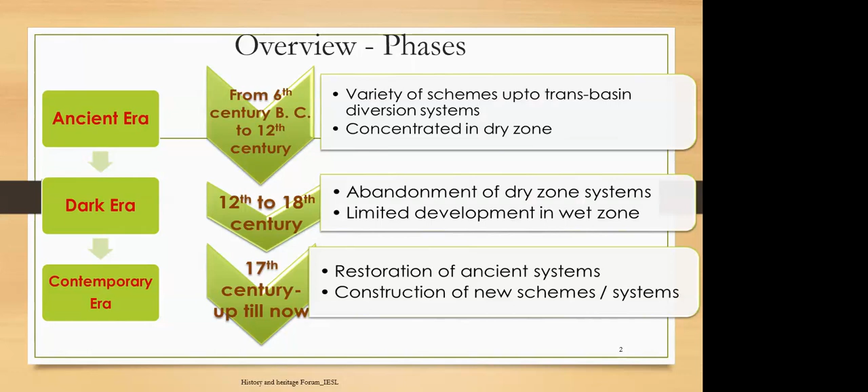The next phase of the contemporary era begins when the colonial rulers start restoration of the abandoned system, and it continues up till now. I will be talking about this last phase only, which will eventually make references to many works in the ancient era. So the contemporary era can be further divided into three main sub-eras: the Dutch era, the British colonial era before independence, and after independence, that is the Ceylonese era.

During the Dutch period, certain attempts were taken to revive the ancient irrigation systems, especially in the maritime area. New irrigation development such as the Urubokka scheme in Magampattu was initiated, in addition to drainage development done by them.

During the British period, there was a period of total neglect on restoration, when the British rulers could not comprehend the situation in the country, in their colony, and thought only of their priorities. Then there were purposeful destructions when they could not control the rebellions, especially in the hill country and Wellassa. After having bitter experiences with all these episodes, the rulers realized that revival of the ancient irrigation system was the only path for their peaceful survival.

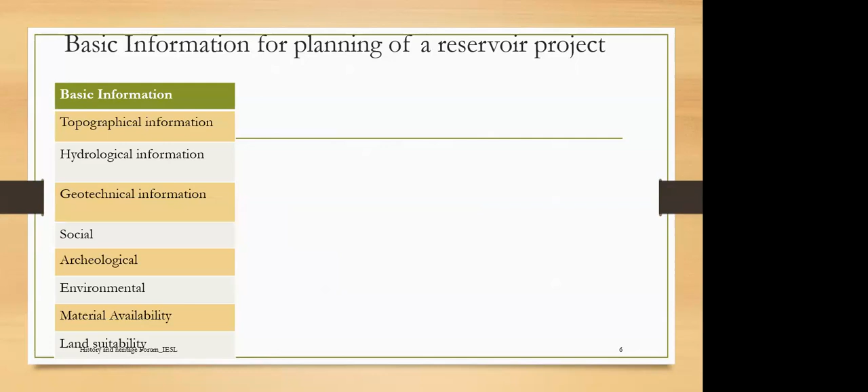If I go to the basics, in case of restoration of any abandoned scheme for many decades or centuries, or for any new construction of reservoir or irrigation system, the engineer may need the following basic information. Under current technological development, some of these are easily achievable, while we need sophisticated instruments or machinery to explore others.

We can appreciate the achievements of our ancestors if we realize how difficult it was to acquire this information when the technology was not as advanced as the current situation. I want you to remind yourselves of these matters throughout the presentation, because without this information, construction was done during the ancient era, and most of the restorations were done without these tools, methodologies, and instruments in hand at the beginning, especially.

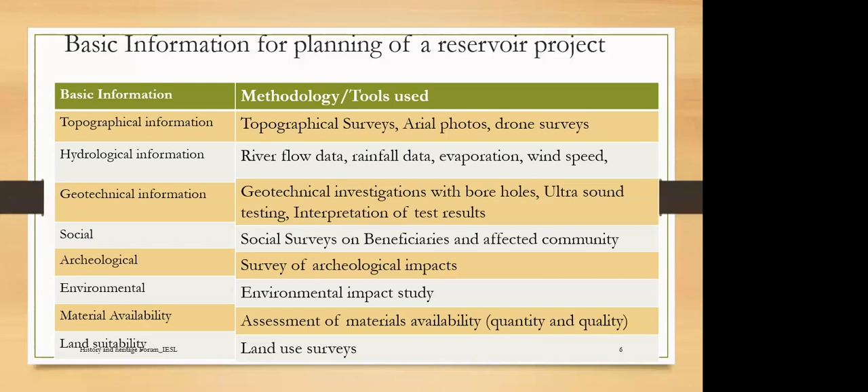So if we consider the mid-19th century, when restoration started, and compare the basic information needed with what was available, there were no survey maps at all. Most of the basic information I mentioned in the previous slide was not available.

Under some major schemes, there were no inhabitants depending on them. Many schemes were converted to thick jungle, and one cannot identify them. If you go into the forest, nobody can identify whether it is high ground or part of a breached dam, something like that. So no technical standards, guidelines, or specifications were available, even to refer to.

The government targets those days were food security, reducing imports, and land settlement - developing land settlements for people to settle under these schemes. No environmental or archaeological regulations were there during that time, and technical standards, guidelines, and specifications, both locally and internationally, were not available. Those engineers from the UK who were engaged at the beginning also had very limited experience, because reservoir construction itself started in the United Kingdom only in the 19th century.

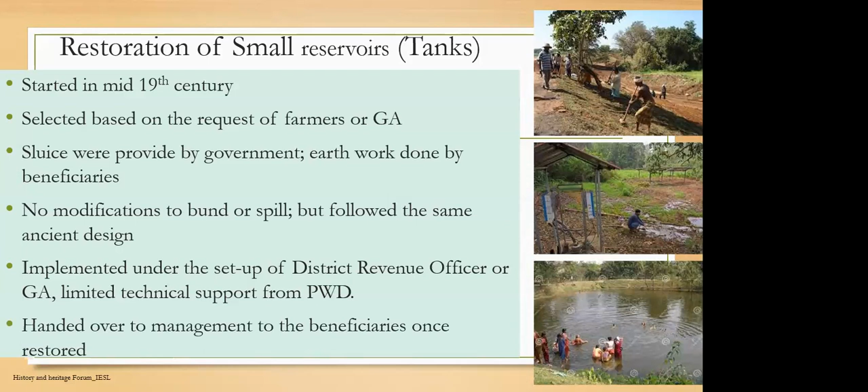As I mentioned earlier, only physical observation and some limited surveys could be done to restore the village tanks. Things improved when the government started developing topographical surveys in the country in the 1870s. When the whole island was covered by this type of 1-inch map, everyone realized the extent of irrigation systems that had been developed by our ancestors and which were now in a dilapidated condition.

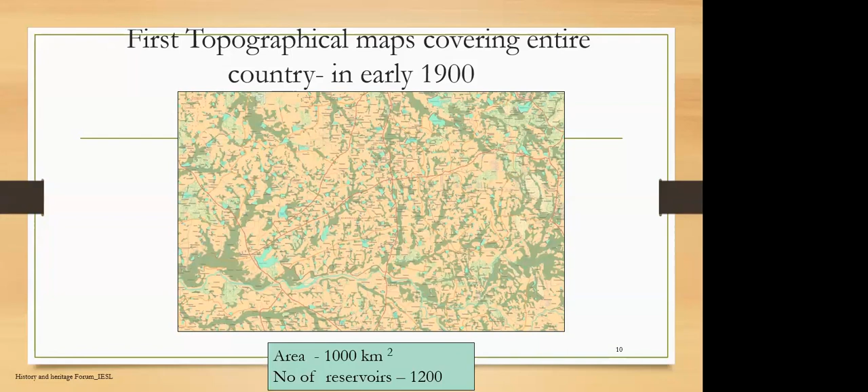Most of these reservoirs—this topo is from the 1960s, but the topo sheets prepared in the early 1900s had shown most of these village tanks in an abandoned state.

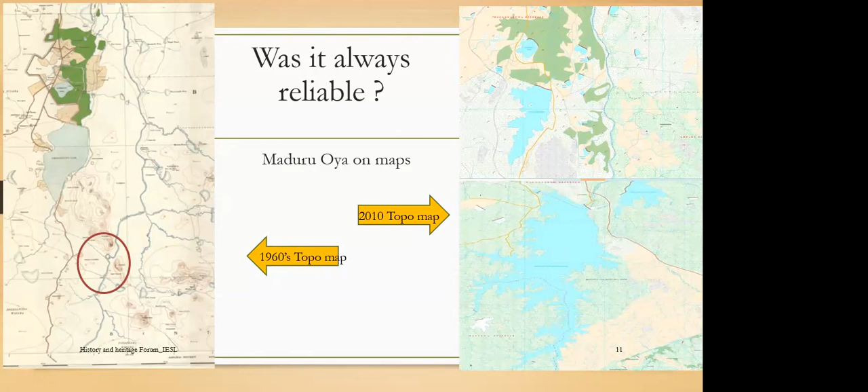Let us now see what type of sluices were constructed in village tanks during the 19th century, when restoration work started. There was no guidance for the engineers to follow during restoration, as I mentioned previously several times. So most of the solutions were based on their limited knowledge and exposure gained during graduation or while working in the field.

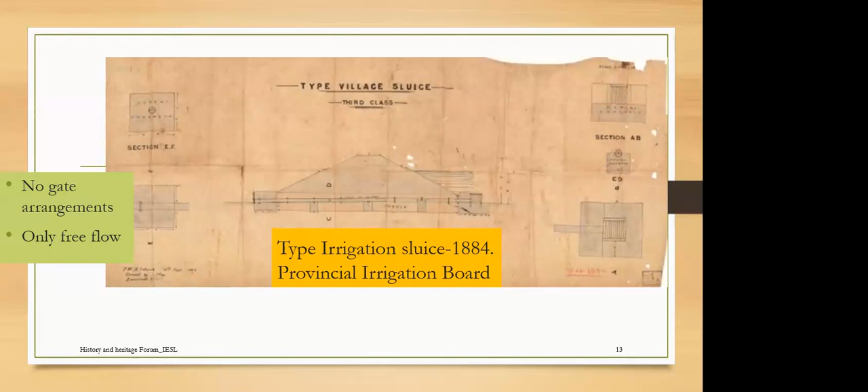This arrangement is a bit more advanced—this 1884 type plan for a village reservoir. It is a bit of a sophisticated arrangement for the sluice inlet, but only a free flow is allowed. There's no gate, sluice gate, or sluice well introduced there.

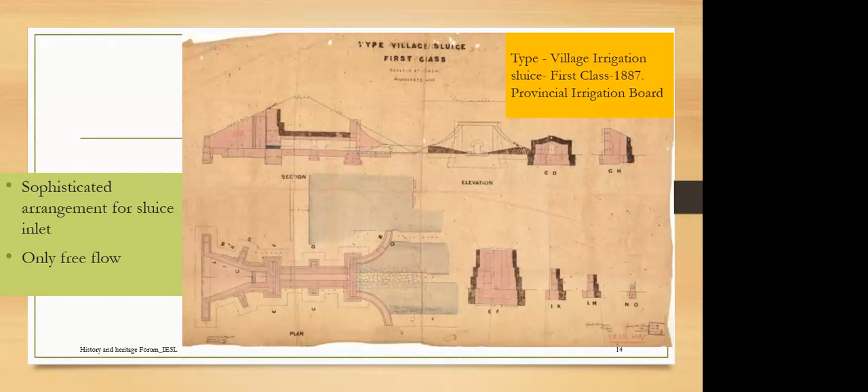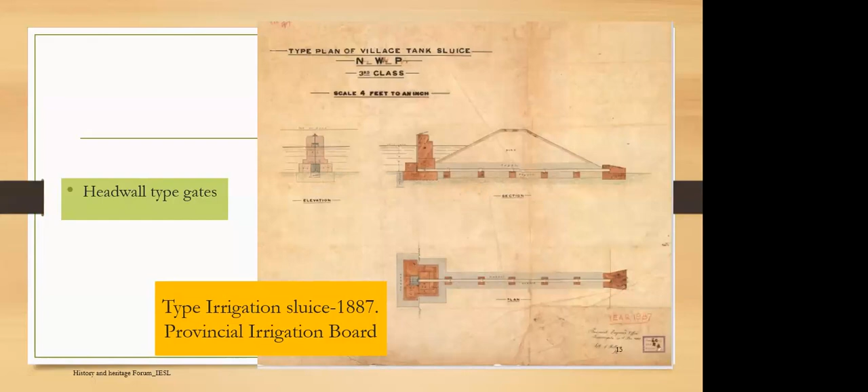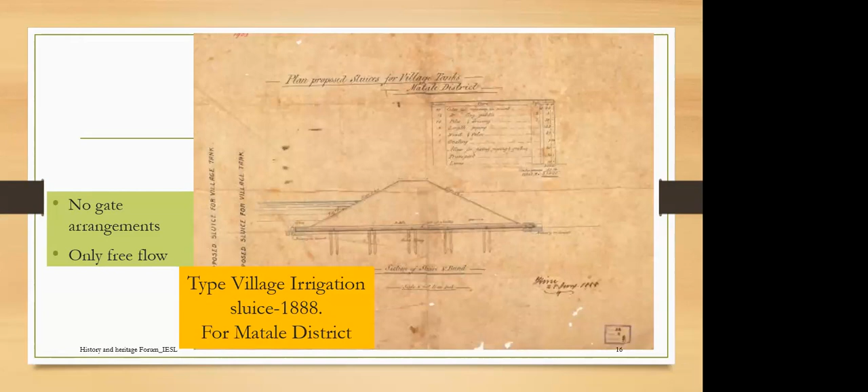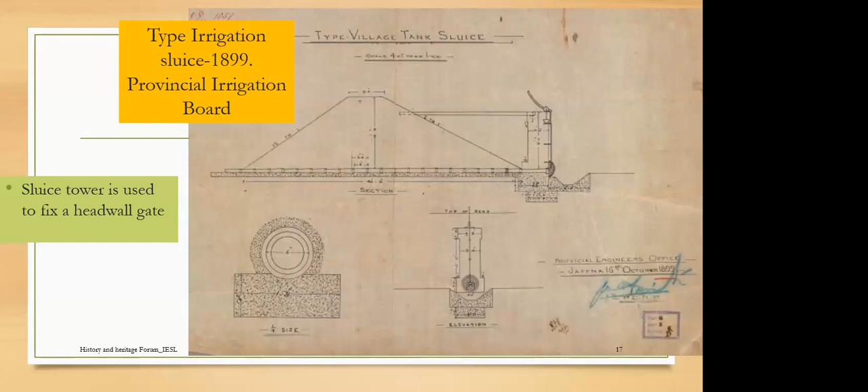I'm sure most of the irrigation engineers working in the irrigation sector here in the audience will have a lot of comments about these primitive arrangements. So I'm not going to highlight the shortcomings of all these plans I've shown so far, but just mention briefly that British engineers would have learned through trial and error methods for the best suitable solution for the sluices in these small tanks.

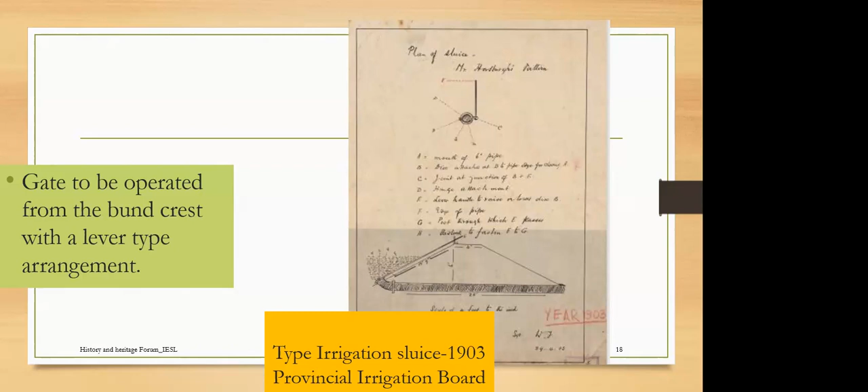The next important component of a reservoir is the spill, whether it is a village reservoir or a large reservoir. So what technique did they adopt to provide spills to the village tank? It is the same spill location and length they provided when the restoration was done.

The trial and error procedure was the order of the day, and this procedure had to be changed due to one fateful event in 1923.

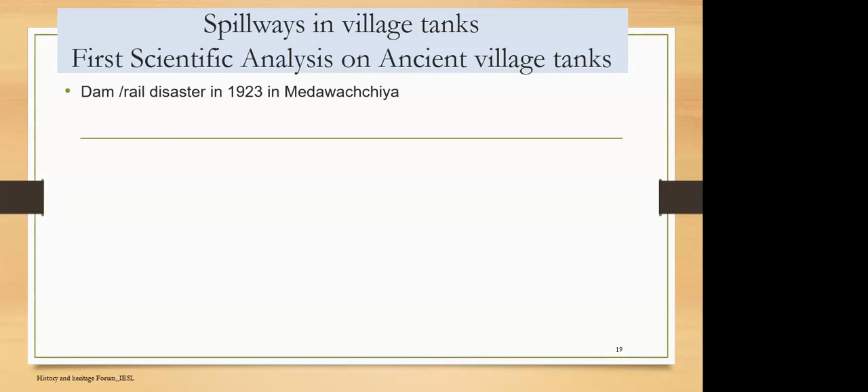That is the rail dam disaster in Medawachchiya. What happened was a night train traveling from Mannar to Colombo got caught in a flood due to a dam breach, and the train got derailed. Under the flood conditions, like a Peraliya tsunami case, 20 persons died on the spot and 35 persons were seriously injured with fatal injuries.

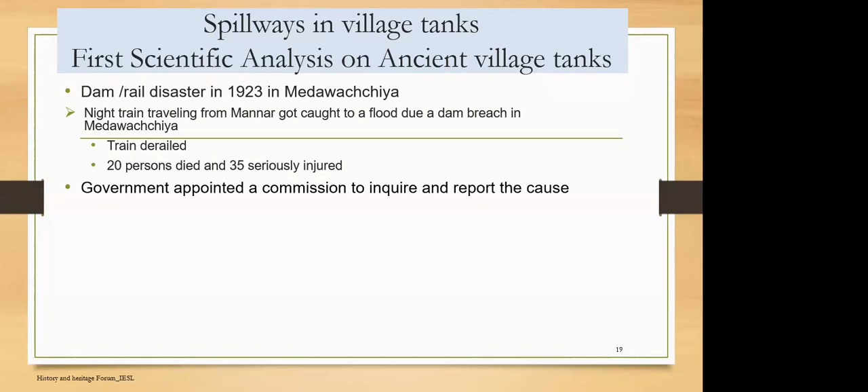So the government appointed a commission to inquire and report the cause. In those days, the government took the commission report very seriously, not like today. As a result, technical investigations were carried out as a follow-up of the commission's recommendations.

The commission report recommended that all the small village tanks from Polgahawela to Mannar, and also the Jaffna railway line that could be affected by damage from any small village tank, be inspected and reported.

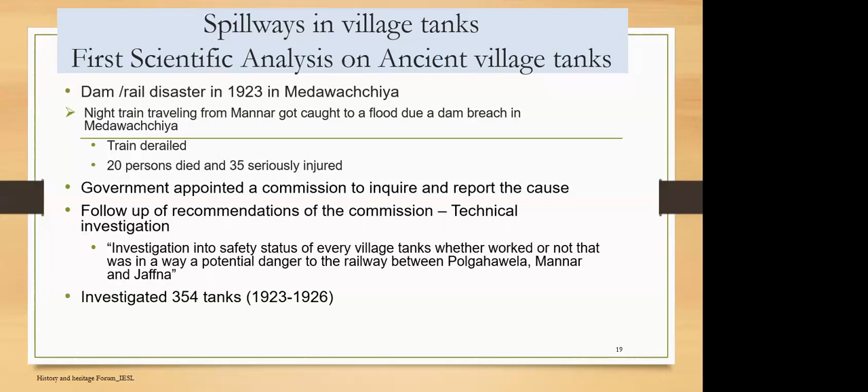So the Irrigation Department conducted investigations on 354 tanks during the 1923-26 period, and the results were submitted to the government.

Moreover, the engineer J.S. Kennedy, who was the team leader and who later became the Director of Irrigation, presented a paper on this investigation and study to the scientific community of engineers. It is called the paper on the evolution of scientific development of village irrigation works.

I recommend, especially the students listening today, to read this paper and get an idea of how much detail went into analyzing the situation of the village tanks at that time.

The paper concluded with recommendations to follow up. At that time, only one department handled irrigation-related work, the Irrigation Department, so it was not difficult to combine the suggestions in the technical paper into the official procedures.

The paper gave comprehensive guidelines for preliminary investigation, detailed investigation, and so on. These were embedded into the official design and planning procedures and continued.

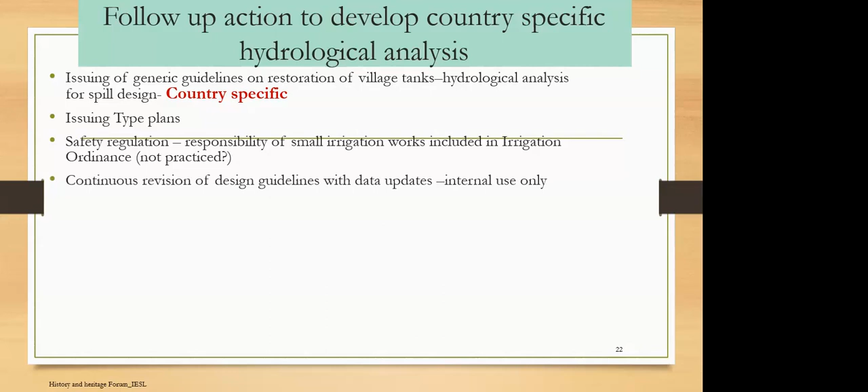The design guidelines were updated continuously in the irrigation sector, especially for internal use, and developments continued like this.

In 1983, I'm sure most of you know about this, engineer Ponrajah published the design of irrigation headworks in Sri Lanka for small catchments. That was a continuation of the previous paper I mentioned. Engineer Arumugam also published several other guidelines in the 1950s.

This became a national level guideline when other water-related institutions came into the scene, such as the Mahaweli Authority, the Agrarian Development Department, and so on.

The most recent development in this area was last year, when the 1983 guideline was updated, especially with 80 years of hydrometeorological data collected by the Irrigation Department's Hydrology Division. Climate change impacts were also considered and included in this guideline.

So you can see the progressive development happening. It is not a stagnant or static subject in this matter; it is a very dynamic subject, changing day by day.

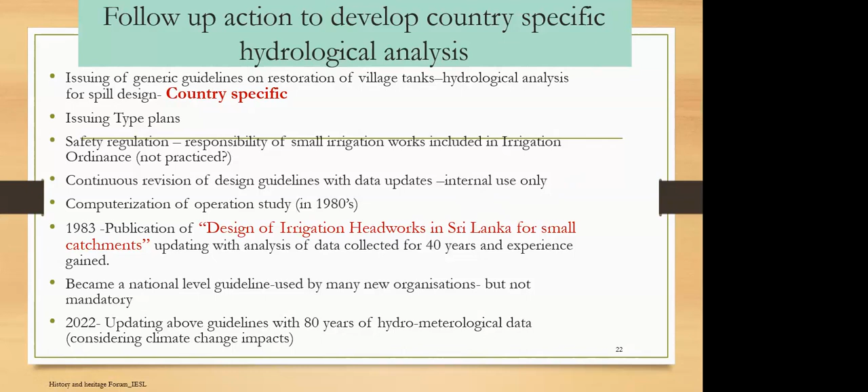So the next development in this area is the exploration of the single small reservoir in this type of model. Thanks to those who have enthusiasm for studying village irrigation systems more holistically, as shown in this manner.

Now the village irrigation scheme has been identified as an entity having many more integral items in it. Most of you are familiar with this diagram, I hope. And the features that supported the sustainability of the ecosystem, which I'm not going to discuss in detail, a lot of literature is available on the internet on this.

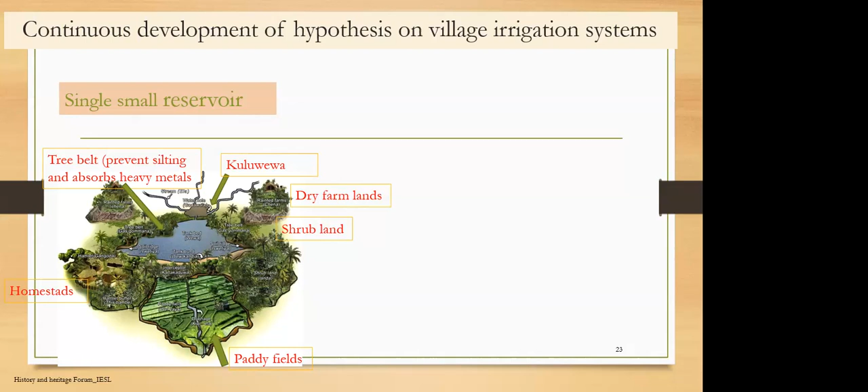And the next level of this hypothesis was developed around the village tank is the cascade system. So it was mooted in the mid 1980s by Professor Madduma Bandara and other scholars, and this is now recognized by the United Nations FAO as a globally important agricultural heritage site.

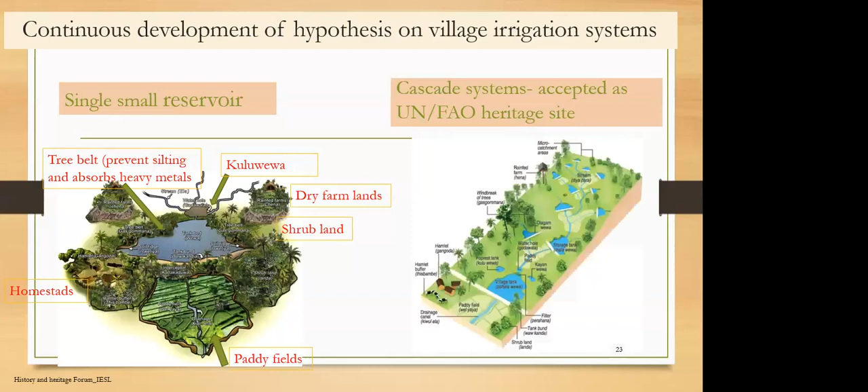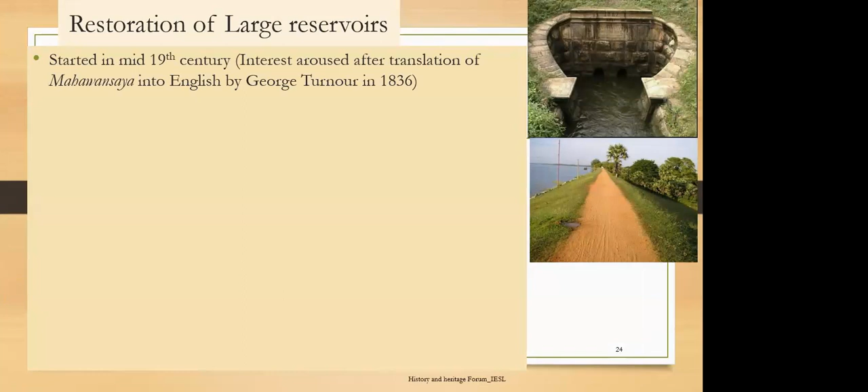Okay, now let us move to the large system, large reservoirs. Restoration of large reservoirs started in the mid 19th century, just after starting the village reservoirs. Then it is said that the interest in large reservoirs actually arose after the publication of the Mahawansaya in English in 1836. It mentioned many large irrigation systems, including trans-basin diversions.

So the selection for restoration was done based on many factors, not like village systems. More comprehensive and accurate surveys were needed for large systems. It is very obvious. The Central Irrigation Board and other organizations, along with the survey department, had collaborated programs.

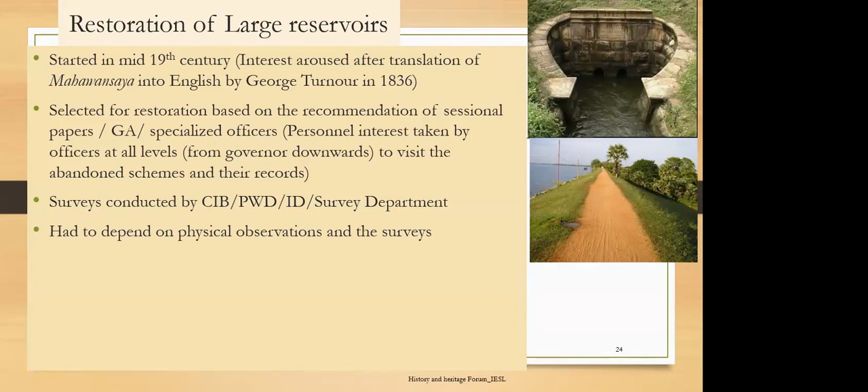And many decisions were based on matters collected through physical observation at the site, and also consulting the inhabitants, and also some sort of hydrological analysis based on the physical evidences in the catchment, and also investigations from time to time, continuously doing investigations until the financial and social conditions become suitable.

So the government's attempt was to recover the cost of the restoration by selling the lands.

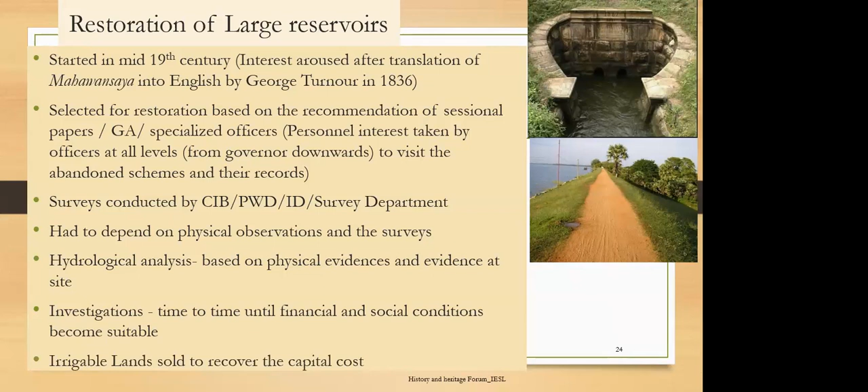When restoring the ancient headworks, the same dam was used if found suitable, with repairs and sometimes with geotechnical treatments. In many of these schemes, spillway locations were at the same place, as it was the best suitable place for discharge of excess water. You can see some photographs showing ancient sluices and ancient dams that were restored.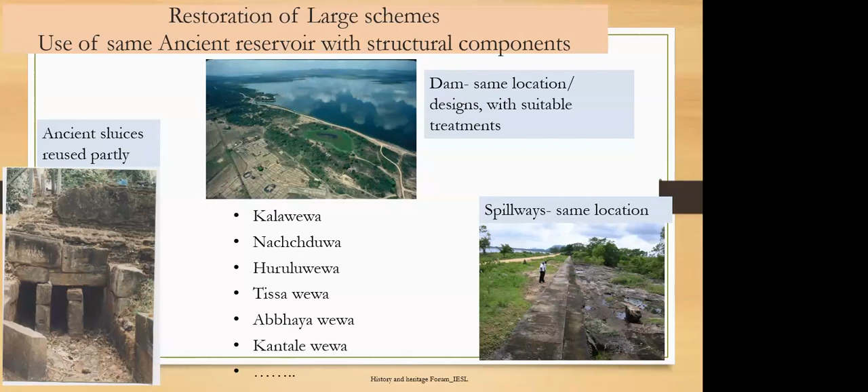Then there was another type of restoration of large reservoirs: if the abandoned schemes were badly damaged, new headworks close to the ancient dam were adopted. So Rambaken Oya, Mahawaya and Maduru Oya are some examples. When engineers conduct geotechnical investigations on old dams, sometimes they find these are not suitable for restoration due to many shortcomings in the dam body, quality of material, and things like that. So a close location, especially upstream of the reservoir, is taken, and an entire new dam and new reservoir is built in association with the downstream system.

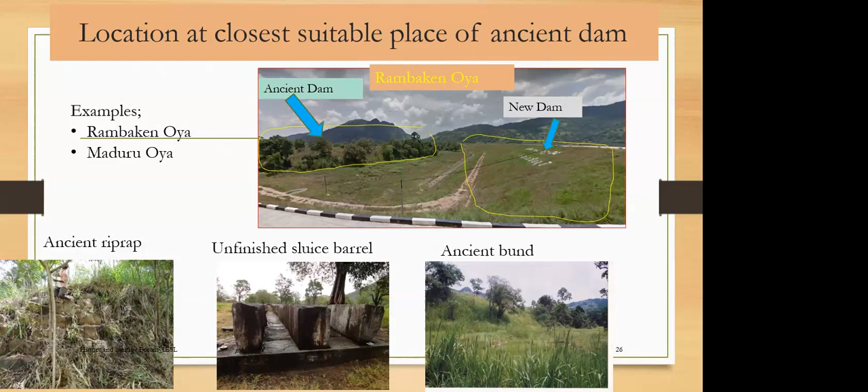So fortunately, these theories and practices... actually, as I mentioned earlier, the physical observation of all these components of abandoned schemes was not possible at all. So to get an overview of the overall understanding of an irrigation project, that type of leveling would not be enough. The project may be scattered over maybe hundreds of square kilometers.

Mapping of a project area is needed to get a more clear idea about that. So fortunately, the surveying theories, practices and technology had been developed to a substantial standard by the mid-19th century. So the surveys done on ancient schemes provided sufficiently reliable, comprehensive data for the restoration decisions.

This is a tracing of the ancient Kalawewa Bund done in 1883, and the tracing is actually dated 1903. It gives the details of the whole Kalawewa Bund, a 5 mile 4,000 feet long dam, showing where the breaches occurred. There are 11 breaches along the bund if you look closely at the map, and the spill level is given, the emergency spillway is marked, bund crest level, and all these details are marked in this survey. So that is why I mentioned that the surveys had advanced to a certain degree, an advanced level, at that time.

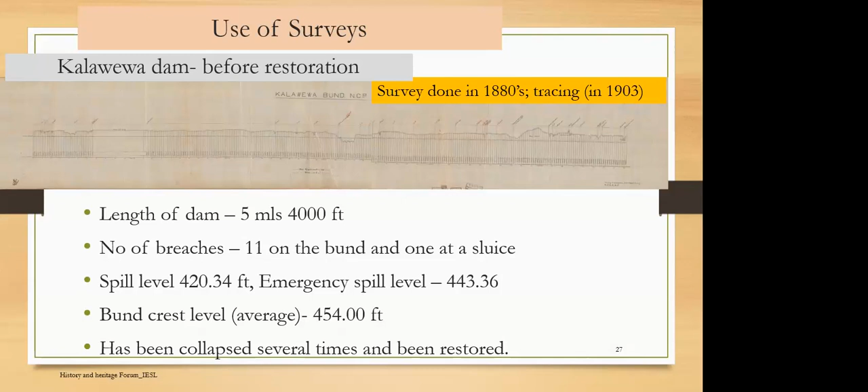Now irrigation officials demarcate the area, and the irrigation officers have to be satisfied with the detailed information. So the next step was to develop engineering surveys on the area where they are going to restore the irrigation system.

The procedure was to get the selected area on a topo sheet and prepare a key plan, like shown on the left hand side. This is a key plan prepared for Elahera headworks, given to the survey department to conduct the engineering survey. Here is the detailed engineering survey sheet, marked with contours at intervals, in scales of 1 foot to 250 feet, or 1 foot to 520 feet, depending on the specification given by the irrigation department.

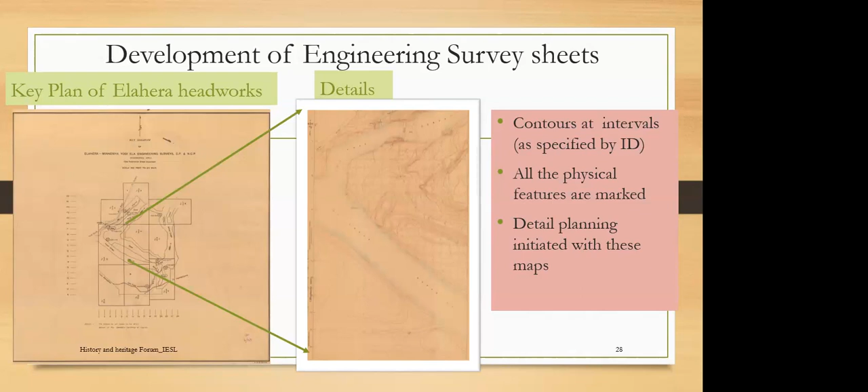This map is the detailed map of the Elahera Minneriya area, Yoda Ela, which gives a plan and longitudinal section on the left hand side, with all the details of the beaching sections and cross drainages coming through, and irrigation outlets that were there earlier.

So the engineer can easily identify the repairs needed in this transbasin canal and prepare an accurate estimate. The engineering survey sheets were translated into blocking out plans, as shown on the right hand side, showing the irrigable area, identifying drainage paths, reservations, community centers, and everything needed in a newly developed area that should be restored.

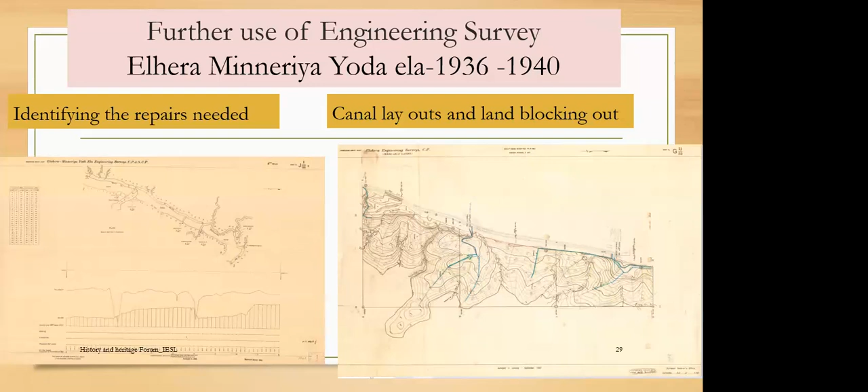This is a blocking out plan prepared in the Kalawewa, Kagama area. It marks all the physical features existing and proposed, additional minor sluices, and new community centers proposed. Those are highlighted in my map here.

So for you to get an idea about the planner's intervention at that time - there are thousands of these type of drawings shelved in the survey department and also in the irrigation department, which will be very useful for future researchers to compare the status of a scheme with its past condition.

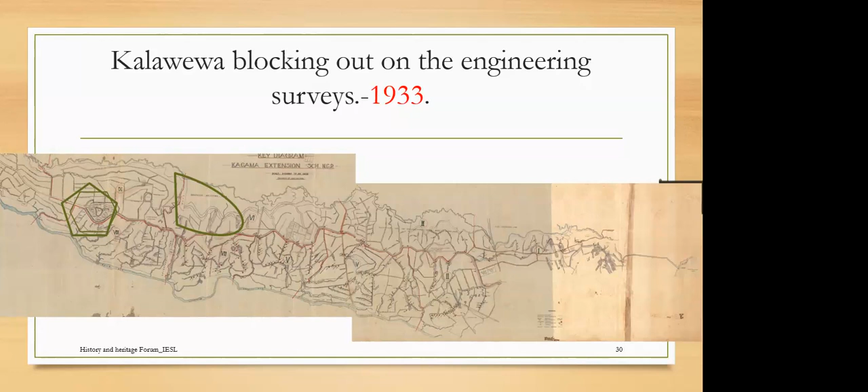Then I will move on to discuss briefly the observations made on spills, embankments, and sluices in ancient large reservoirs.

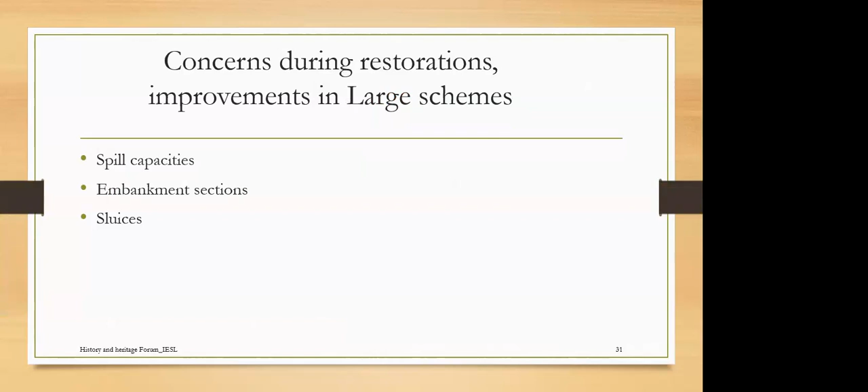When coming to the spillways of large schemes, it is not as simple as village tanks. It was found that major dams always collapsed due to overtopping of the bund, not structural failure of the sluice or anything. Spillways were not sufficient to pass the flood. It is almost a similar case in village tanks.

Basic theories of hydrological analysis were developed by the early 20th century for engineers to carry out operation studies. It was found that spill lengths provided in ancient reservoirs were not sufficient, and hence all restorations required new spill lengths more than double.

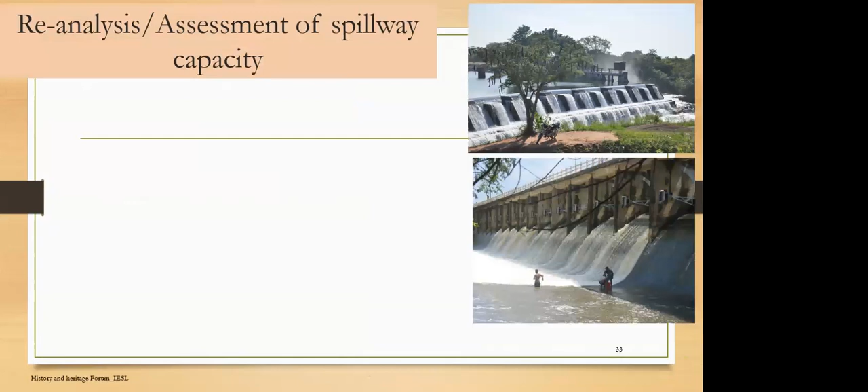Even with the increased spillway lengths, the spillways were insufficient, and that was revealed during the 1957 floods, when 35 major dams and 53 medium dams were breached during the heavy storm. Most of these major dams were restored with radial gated spillways, a new introduction to the spillway design done to cater for the shortage of spillways.

Some of the dams washed away were Kalawewa, Nachchaduwa, Huruluwewa and Padabiya. Many dams in the northern province and north central province were breached during that period. So instead of clear overfall spillways, most of the spillways were replaced with radial gated spillways, or some other gated spillways.

The flood that occurred in 2012 reminded us again of the necessity of reanalyzing the adequacy of spillways under climate change impacts. In most of the schemes, additional emergency breaches had to be done in 2012, and that opened a new pathway for engineers to think about spillway designs in a new approach.

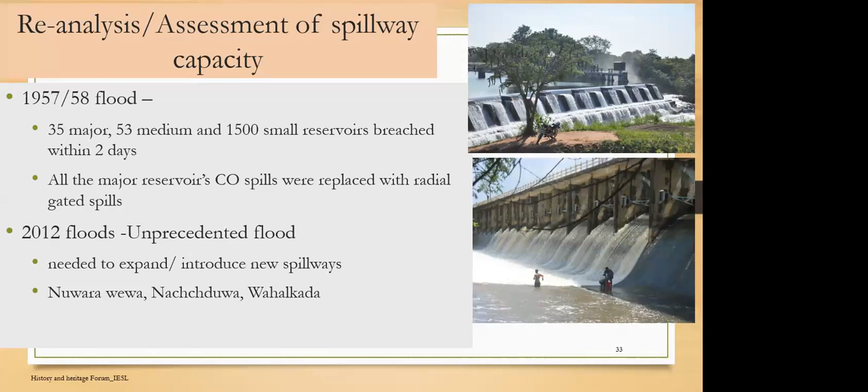Coming back to the high freeboards allowed as a safety measure in ancient dams, I can quote many examples. Here I took Kalawewa again to illustrate this. Some of you have visited Kalawewa and would have seen this ancient sluice of Yoda Ela, and the water when it is above the full supply level.

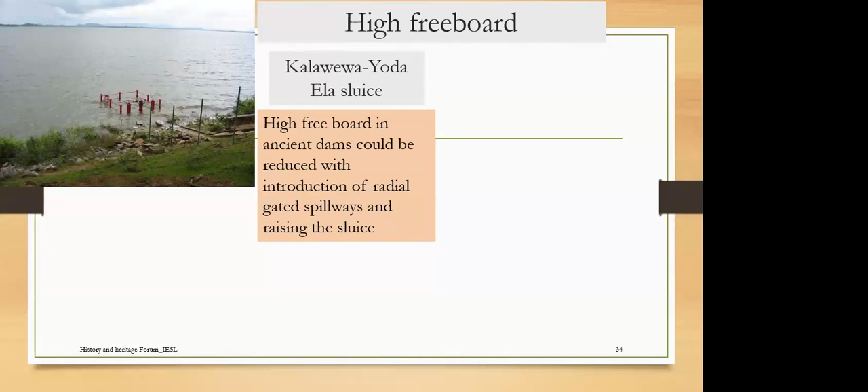When it is reaching the full supply level, the cross section below shows the design of it - the sketch allowing very high freeboard, with the sluice barrel well below the bund crest.

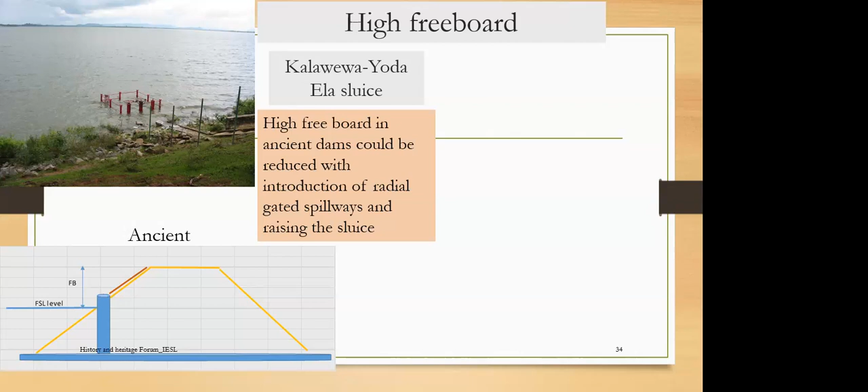The new sluice in Kalawewa is at the same level as the crest of the bund, and then the freeboard is reduced, making use of this additional storage for water management under the reservoir. This can be observed in many ancient reservoirs - if you carefully study, this phenomenon can be easily identified.

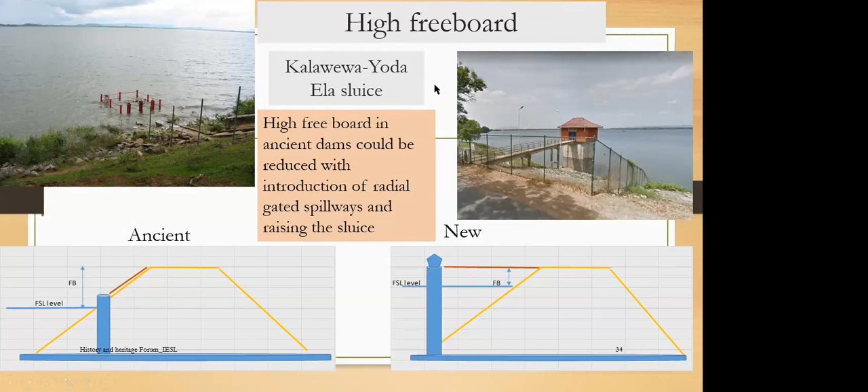My next case is Wahalkada. This was restored in 1971. During that time, it was decided to use the same old bund, and also to use one of the ancient sluices out of the two - there were two ancient sluices.

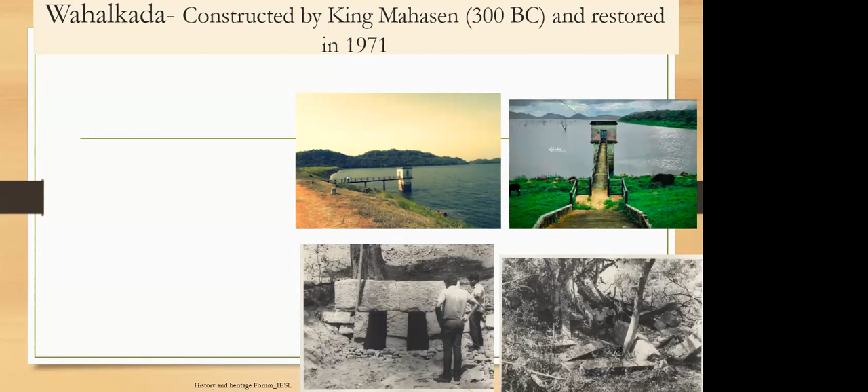But when the construction was going on, it was realized that restoring the ancient sluice would be a risk due to its condition. So by sealing the old sluice, a new sluice was constructed. However, during the first filling of the reservoir, leaks started from the old sluice, and only through grouting could it be arrested. Anyone visiting Wahalkada can still see the outlet of the old sluice, which was sealed from the upstream.

Some of the photographs in black and white show officers conducting field visits during the reconnaissance surveys.

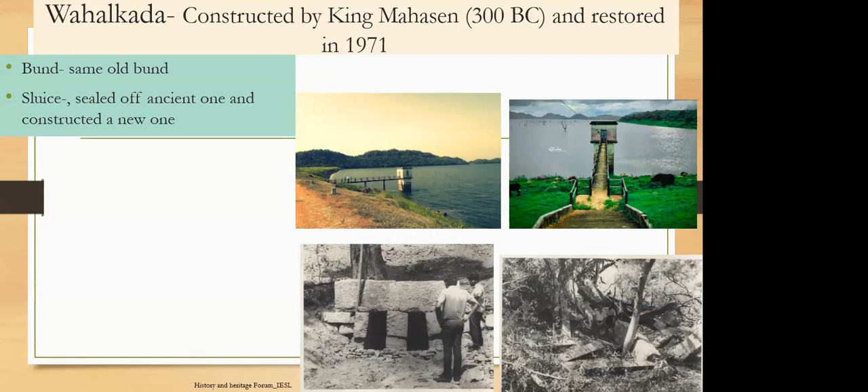The freeboard provided in the old dam was more than 12 feet, and there was no clue at all about any spillway. So designers believed that the reservoir is a non-spilling reservoir, with sufficient detention capacity to cater for the catchment inflow. Even the 1971 design did not provide any spill.

However, it allowed high freeboard, and the crest of the sluice was also kept at a lower level, as shown in the diagram and photograph. By 1984 there was an imminent danger of overtopping the bund, and with some rescue operations it was saved. Later on, the gated spillway was provided.

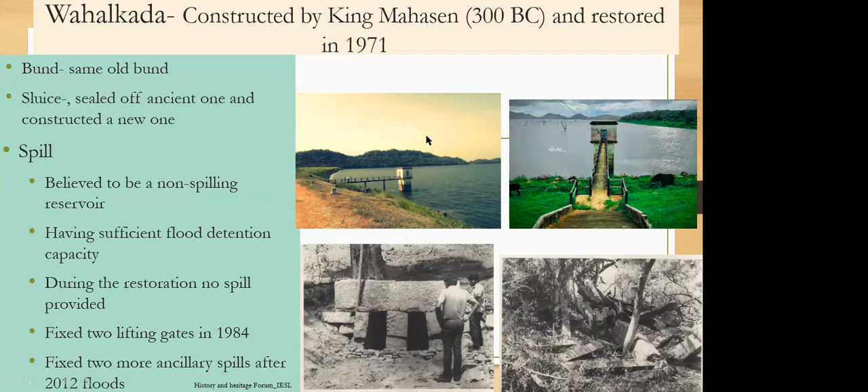And by 2012, this had to be changed again. With climate change impacts, the intensity has increased, so another spill gate had to be provided to the Wahalkada reservoir, which was started as a non-spilling reservoir. That is the story of Wahalkada.

So now this is Lower Malwatu Oya, another large system. If someone asks me to name the most admirable ancient irrigation work in Sri Lanka, my choice is the Giant Tank system in Mannar. There are so many features in this whole system that we will explore even after 120 years of restoration. This is believed to have been constructed during King Dhatusena in the 5th century.

I cannot understand how this unusual design was conceptualized without having a similar model somewhere else - not in Sri Lanka, and even in any other country we don't find this kind of system. According to my knowledge there is no such system; I must explore more whether there are any similar systems in India.

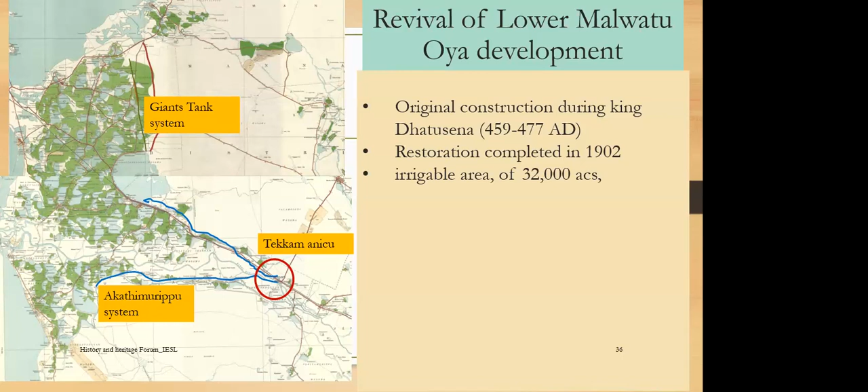A modern engineer would definitely need aerial views or sensitive survey instruments to finalize this type of arrangement in a flat, almost flat area, as this Mannar area is, where the system is laid down. This is a very shallow reservoir which has 7 sluices, which were restored as they originally were.

These sluices serve 162 small reservoirs in the service area. Even though you can see only very few here, there are more than that. This is a shallow reservoir compared with the

irrigable area of 32,000 acres. It receives water diverted from the anicut called Tekkam anicut across Malwatu Oya through a 15 mile long feeder canal. Similarly, another feeder canal from Tekkam feeds the Akathimurippu irrigation system on the left-hand side of the Malwatu Oya river.

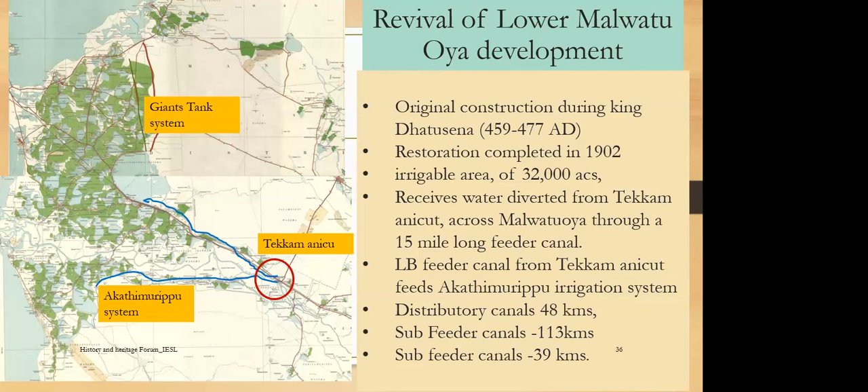The length of the distributory canal in the giant tank system itself is 48 kilometers. Small tank feeder canals are 113 kilometers, and sub-feed canals are 39 kilometers. I just want to highlight these figures to give you some idea of how complicated the system is. It is the same old ancient system that is functioning now.

If you consider the Tekkam anicut alone, it is another wonder, unlike other ancient anicuts built obliquely in a river. This ancient anicut is built across Malwatu Oya, perpendicular to the flow. It stood against gigantic, turbulent hydraulic forces that create flood discharge exceeding 7,000 meter cube per second. It was made with large stone blocks interlocked, with gaps filled with indigenous mortar blended with sand, lime, bee honey, wood resins, and many other local materials.

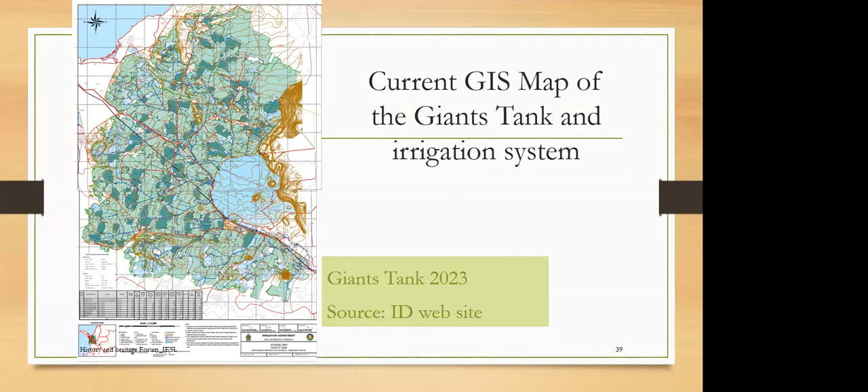As I mentioned earlier, there is a possibility of wrong interpretation of some of the observations made during the initial restoration. The spill path of the ancient tank was identified and restored in 1901.

In such a case, I can quote this example. Until 2014, while spilling, this was the selected spillway path during the restoration, because the spill structure was there at the place shown here in the giant tank's right-hand corner.

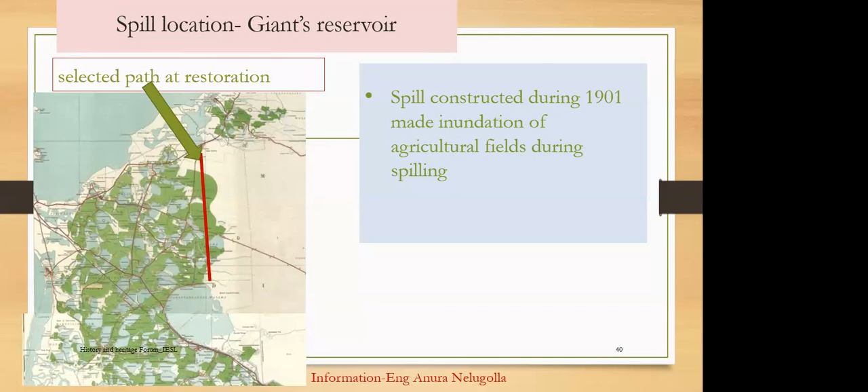After restoration, this spillway caused a lot of damage to the irrigable area, inundating a large area with each spilling. However, during 2014 - that is after 120 years of operation - irrigation engineers found that the actual ancient spillway was not the one selected in 1901.

It runs through another path further northwards to another sub basin. However, this path was not identified at the beginning and was completely overgrown with very thick jungle. It was declared as a national park or strict forest reserve, and got silted up. So it was opened up anyway in 2014, and now it functions smoothly without damaging the paddy lands.

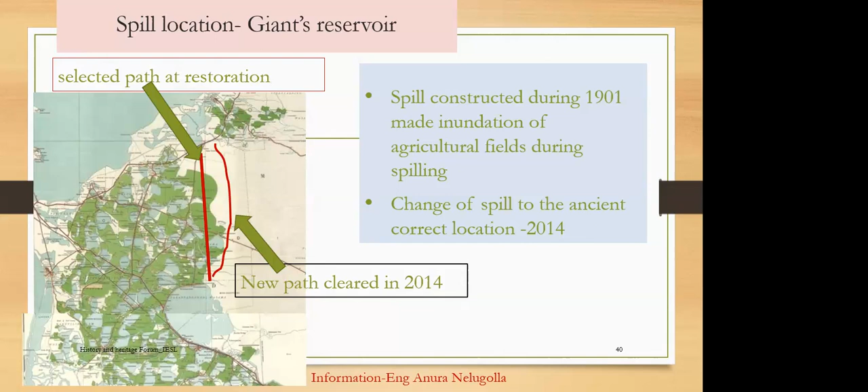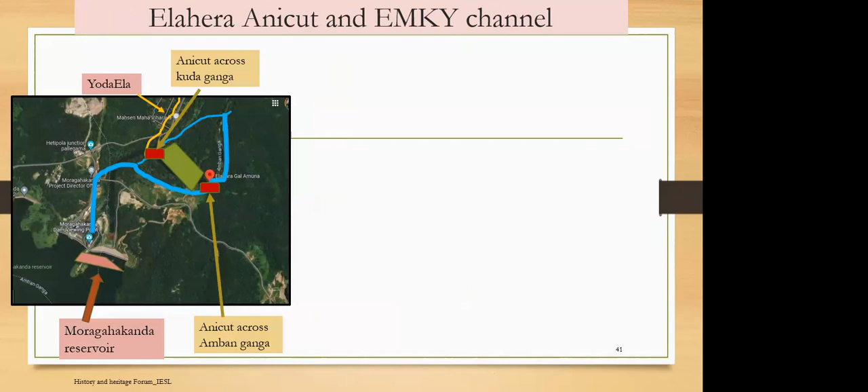My next selection is Elahera, to give you some brief information about the restoration of the anicut. The selection of the suitable place in Amban Ganga is a genius decision, which I showed in my previous engineering survey sheets as well. The site condition provided a perfect base for the

firm foundation, and the surveys done by 1887 revealed that the foundation is suitable for any type of construction, even a new construction.

The technique used in blocking the Ambanganga in ancient times was to head up the main Ambanganga here with the anicut, and then - I don't know whether you can see my pointer here - it is the main anicut, and then it heads up the water and sends the water through the Kudaganga.

And then at the Kudaganga, there is another anicut that diverts water through the Yoda Ela, starting from Elahera anicut up to Minneriya and Kantale.

So the two new anicuts constructed in 1945 during that restoration are almost at the same place, and anybody who visits the place now can see remnants of the ancient anicut intact, though there were some disturbances from flood flow and things like that. Many other remnants can also be seen at the Elahera anicut.

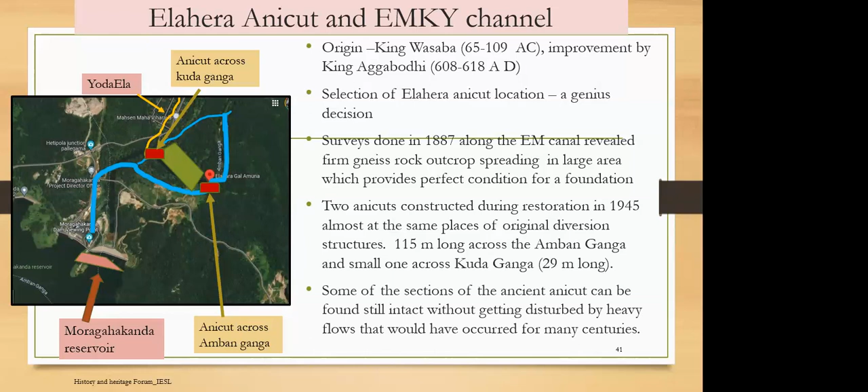And then Elahera Minneriya Yoda Ela again is another marvel. It is a single bank diversion canal that conveyed water up to Minneri with a 25-mile long canal, and to the Kantale Reservoir.

So there are 3,700 hectares directly fed by this Yoda Ela, and you can see the drawings done in 1887 after a survey along the canal, marking all the breaches. This is the first mile shown in the drawing.

It marks all the breaches and features along the canal, and they have found the stone foundations and some stone pitching along the canal that were vividly given in R.L. Brohier's book, and those were found to be the canal spillways.

In the modern designs, in the current restorations, those spillways were replaced, sometimes with radial gated spillways. The inflow is so huge that without providing the radial gated spillway, the inflow cannot be sent outwards without damaging the canal.

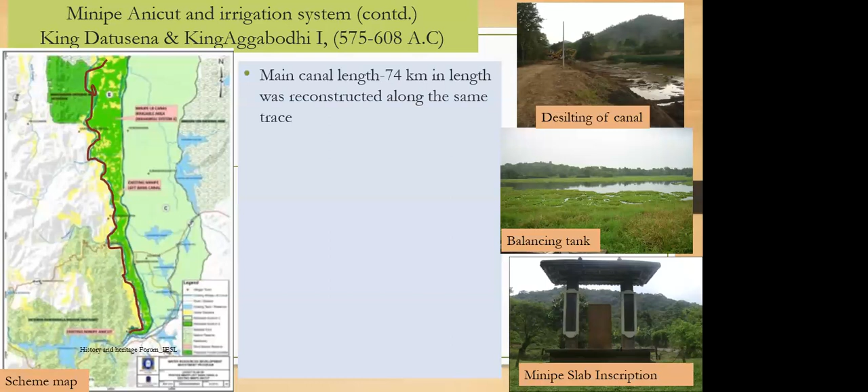Going into more details about the ancient Minipe Canal, starting from this anicut, it is 74 kilometers in length and was reconstructed along the same path. The irrigable area is a narrow land strip between the anicut and the Mahaweli River.

This setting up of this canal and the other features is amazing. There are 7 main streams crossing the canal, provided with spill aqueducts under current design criteria.

So actually, it is not a simple single bank canal as you see when you go to it, but one flowing through very complicated topography. I have no idea how this trace was laid and later maintained, especially the maintenance of this type of complicated system, comparing with current problems in maintaining other canals. I cannot imagine how they have managed the Minipe Canal system even after construction.

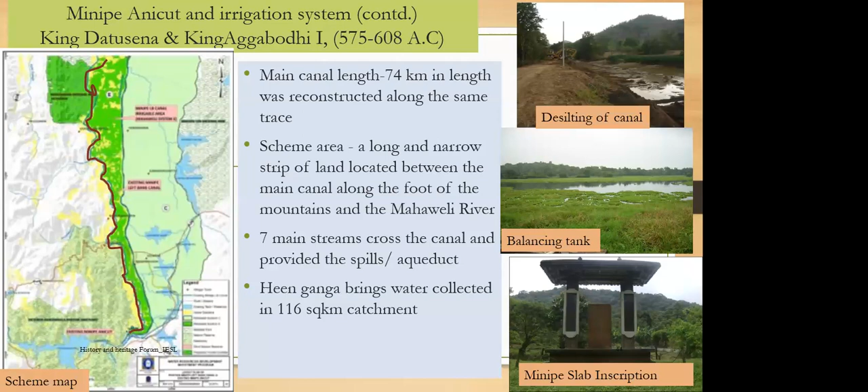Moving to the last segment of my presentation: the recent restoration that started but sadly had to stop due to the current economic crisis. I wrote an article about this work also to the IESL newsletter in 2016.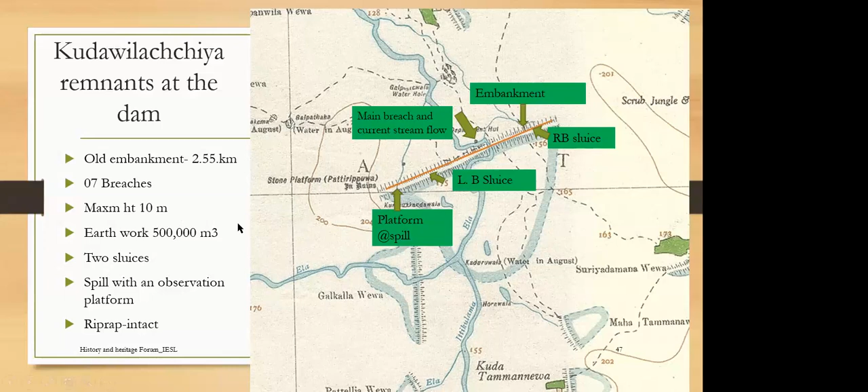During the reconnaissance surveys, the following features were observed in the ancient dam and headworks: the old embankment was 2.5 kilometers long, with 7 breaches on it. Maximum height of the dam was 10 meters from ground level. Earthwork could be estimated at 500,000 cubic meters, and there were 2 sluices. I will go into more details of this later in other slides.

This is the sluice barrel. It is still in good condition. Until recently it was a shelter for the bear family, until when irrigation officials were doing surveys, the bear family was there. It was made with 8 feet by 2 feet by 2 feet cut stone and covered with the thick brick masonry shown in the previous photograph.

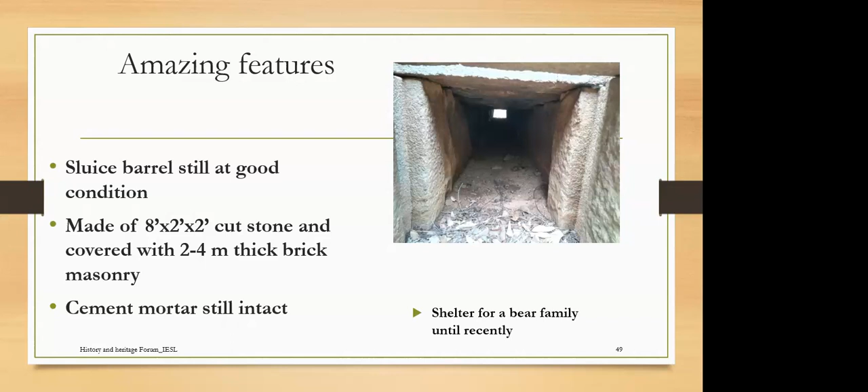The sills of the 2 sluices were at different levels. This can be observed in many ancient dams like Kaudulla, Nuwara, Minneriya, Parakrama Samudra - everywhere, the sluice levels are at different levels. This shows that ancient engineers had very precise leveling methods to fix the exit level of the sluice to suit the levels of the irrigable area to be served under gravity.

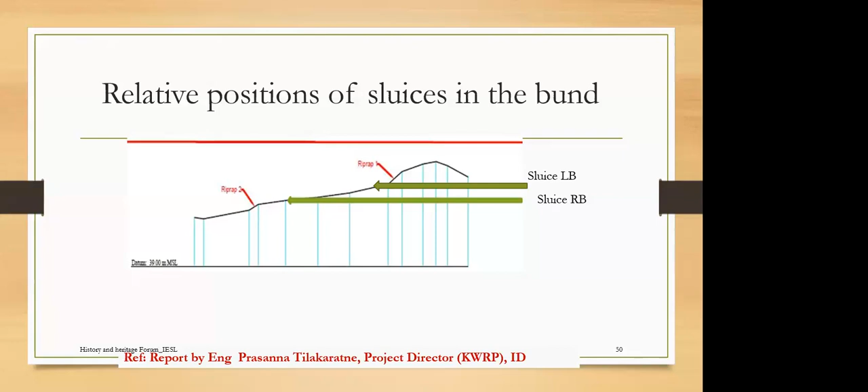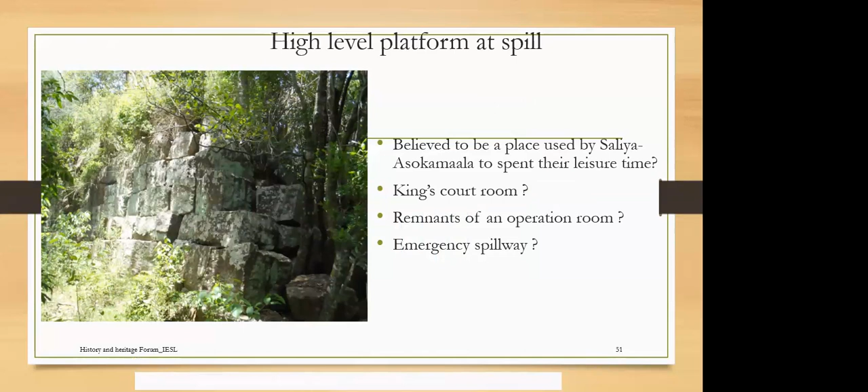So this is a unique feature in this old reservoir - a platform at the spill. There are so many folk tales behind it. It may sometimes be remnants of a reservoir operation room or an additional emergency spillway. We don't know it. And this is supposed to be the spill.

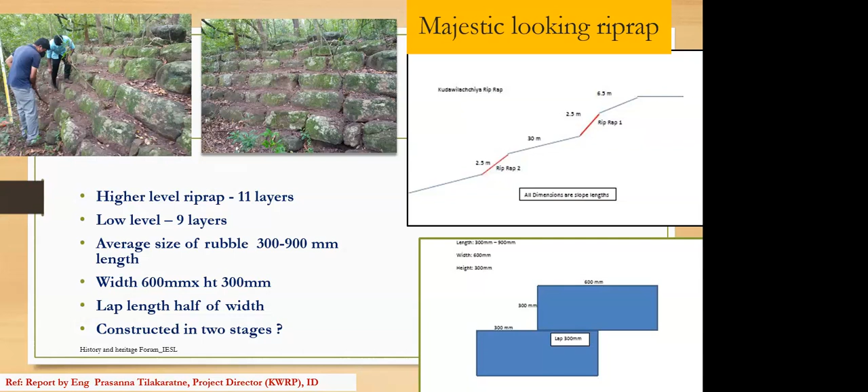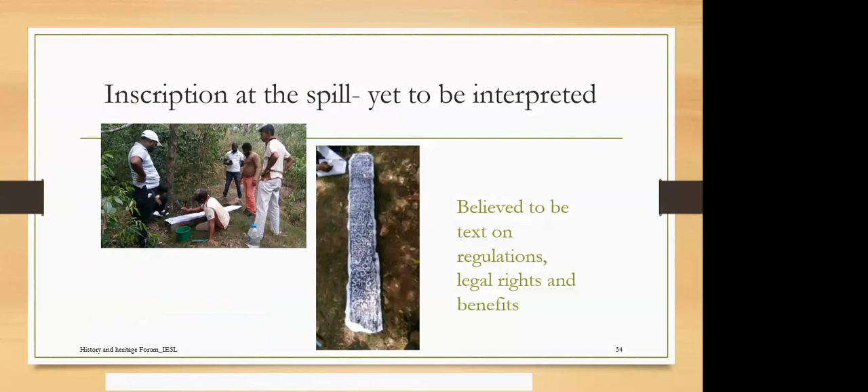The archaeological officers here are trying to copy the inscription at the site during their visit, which was included in their report. They believe it is a text on regulations, legal rights, and the benefits of the reservoir.

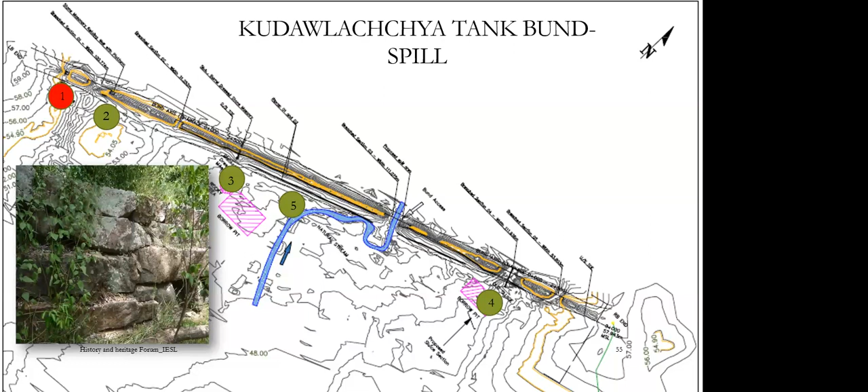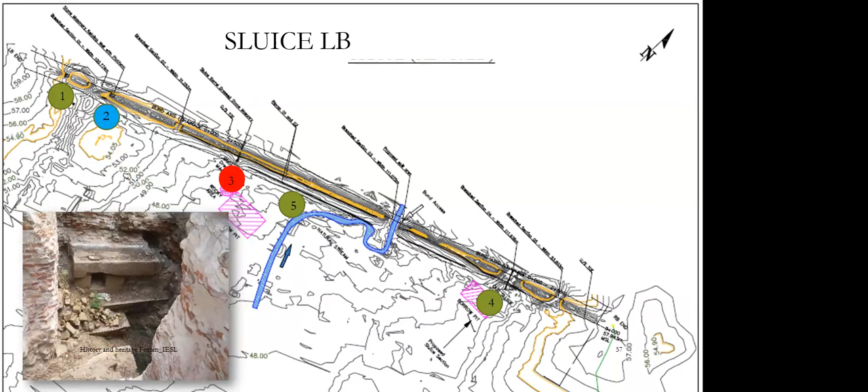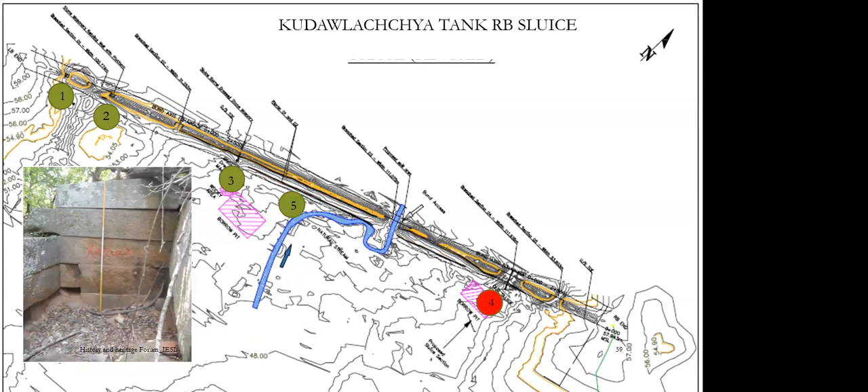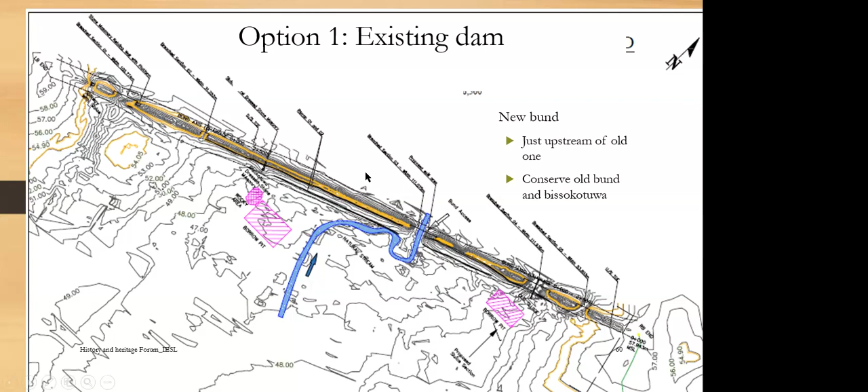Irrigation officers considered 3 options for restoration during the planning stage. The first one is restoration of the existing dam as it is, so they selected the dam trace along the same old dam as shown in yellow color. If we adopted that same bund, the bund section would have been this one - you can see this is very unusual, because the slope is 1:4.5, and this is not economical anyway.

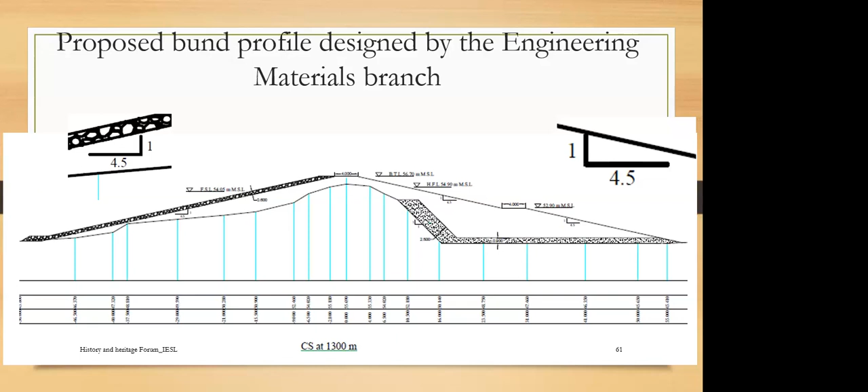If we were to adopt the same old dam trace, this would have been the dam section. The second option is an entirely separate dam upstream, about 125 meters upstream of the ancient dam.

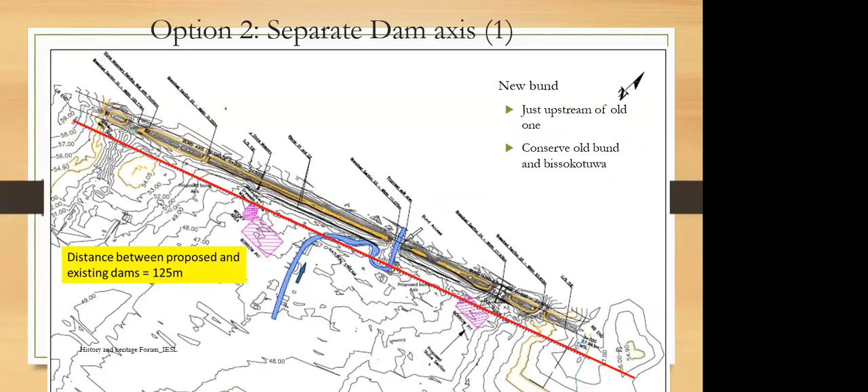After consulting the archaeology department, they were of the view that important features of the ancient dam have to be preserved.

So the site preparation work is already done, but construction came to a halt due to the current economic crisis. So our heritage forum members of IESL can still visit this site and see with your own eyes this amazing heritage site.